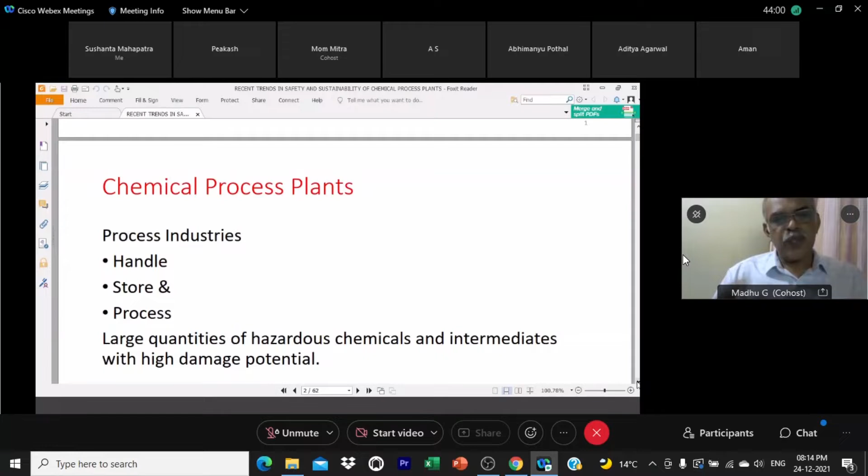As I pointed out earlier, process plants, including petroleum refineries and petrochemical plants, store large inventories of raw materials, intermediate products, and finished products. The substances in storage, along with stressful operating conditions, since many chemical processes work under high pressure, high temperature, as well as controlled exothermic reactions.

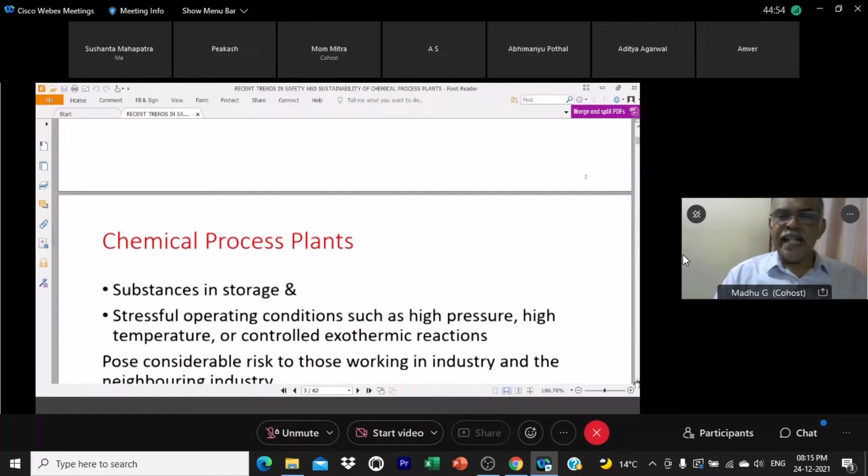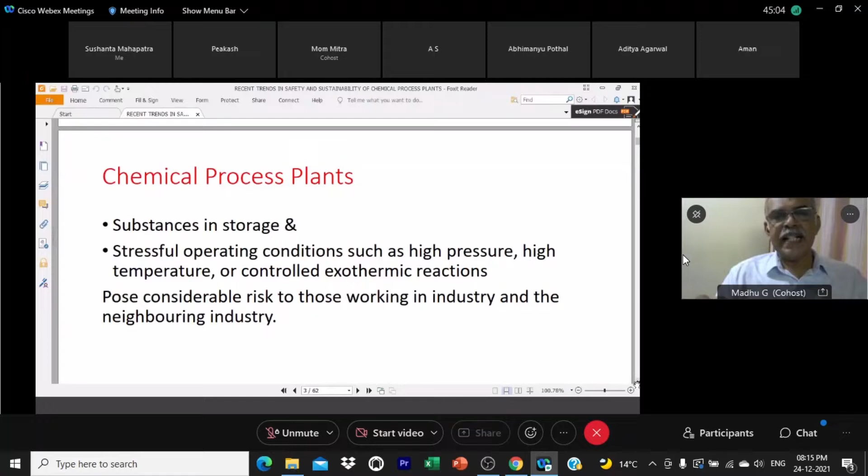These conditions pose considerable risk to those working in the industry, as well as in the neighboring industries and the neighboring community. That is the reason for this high risk in chemical process plants.

You may be aware of the various disasters that have taken place in chemical process plants over the last more than 100 years. Several incidents have occurred. If you examine these accidents involving major hazards in chemical process plants, they can be categorized into two. One is loss of containment or leakage of highly flammable substances.

When these flammable substances are highly volatile, they mix with air and may form a flammable vapor cloud, depending on the flammability range and other factors. That cloud will drift to a source of ignition, and ultimately result in a fire or explosion.

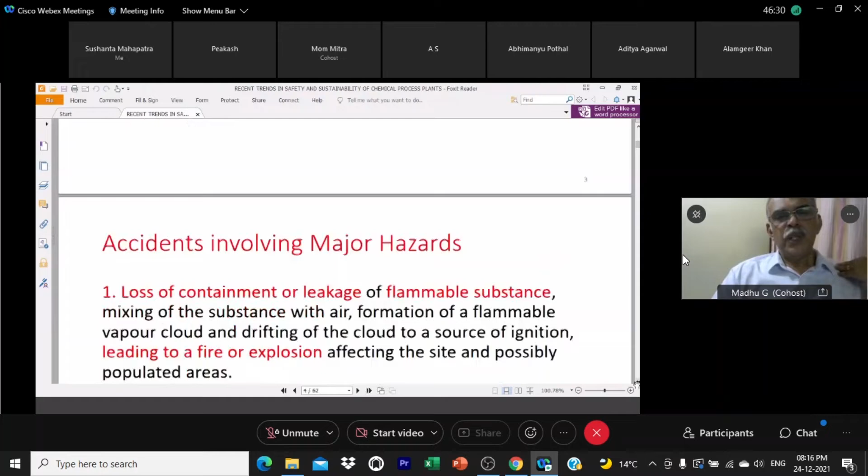Usually vapor cloud explosions and BLEVEs, boiling liquid expanding vapor explosions, are very common in chemical process plants. The fire or explosion will affect the site and possibly populated areas. This is a typical case of loss of containment.

For example, in a petroleum refinery, you have large storages of crude petroleum as well as petroleum products. If there is a loss of containment due to any reason, it can result in such a situation.

The second category is with respect to toxic substances, leakage of toxic substances from the containment. These substances also form a toxic vapor cloud. We have the example of Bhopal, which is considered the worst industrial disaster we ever had. Once these toxic substances form a vapor cloud, they drift in the atmosphere.

A number of accidents have taken place in process plants, and if you analyze these accidents, you find that the main causes were due to four major reasons. Other reasons exist too, but the percentage contribution of these is more. One is human error.

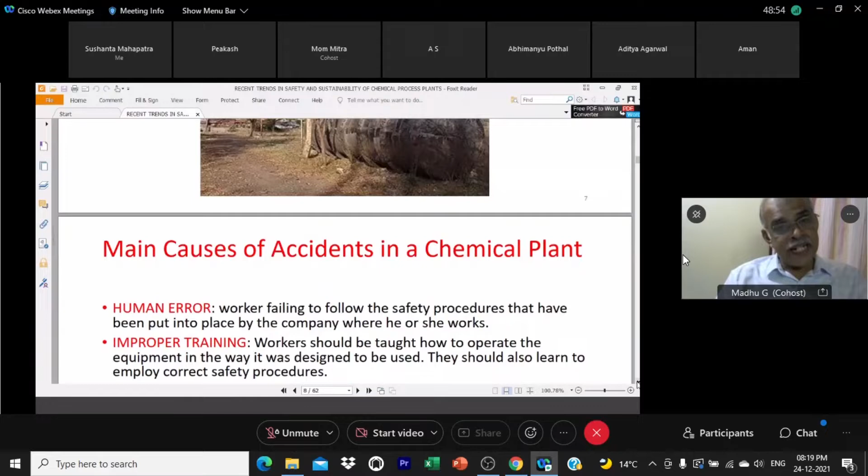Then, of course, improper training. Training plays a major role, educating operating personnel to operate equipment the way it was designed to be used. Equipment should be operated as designed, and operators should also learn to employ correct safety procedures.

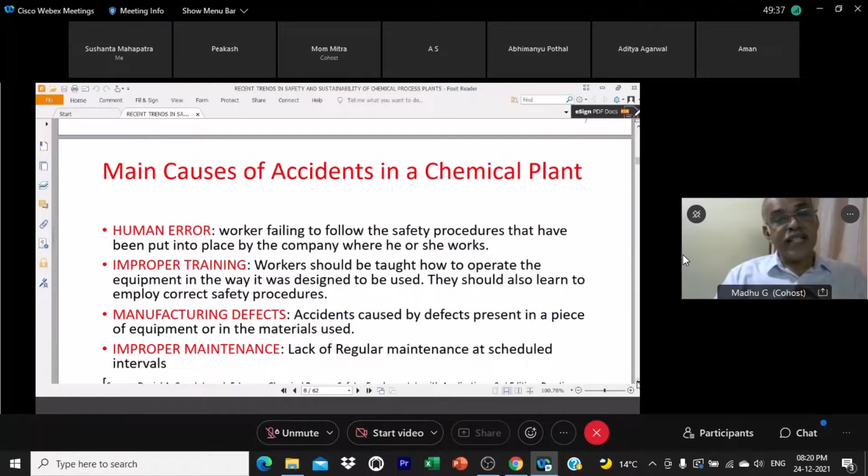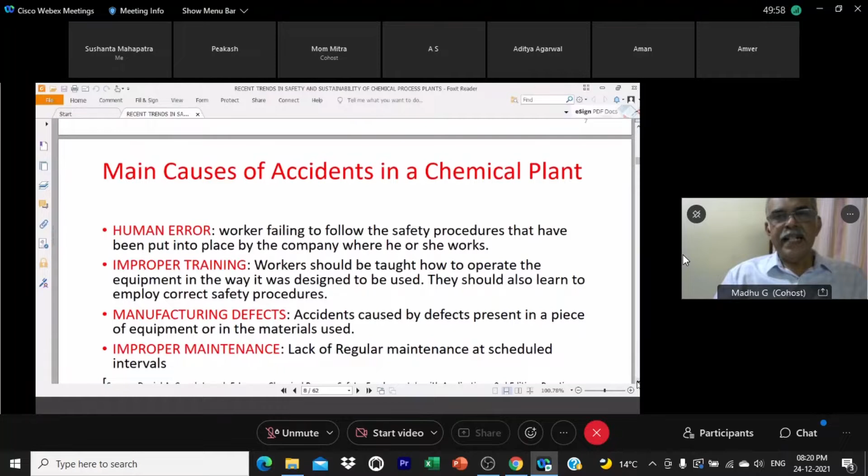Here, of course, the supervisors and the top management has a responsibility. Then the manufacturing defects, defects in equipment as well as the materials used—that is another major issue. Then improper maintenance, lack of regular maintenance at scheduled intervals—that is again another major factor that leads to many accidents in process industries.

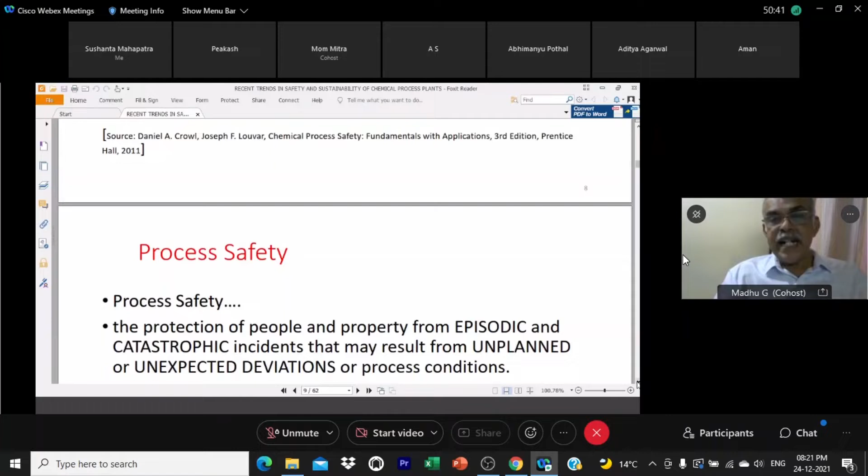Now, coming back to process safety. Process safety can be defined like this. It's a definition given by the Center for Chemical Process Safety of the American Institute of Chemical Engineers. It can be considered as the protection of people and property from episodic and catastrophic incidents that may result from unplanned or unexpected deviations. This can happen because any accident occurs due to unexpected deviations or unexpected process conditions as far as a chemical industry is concerned.

Now, before discussing the recent trends in process safety, I wish to share with you the pillars of process safety. This framework has been formulated by the Center for Chemical Process Safety, CCPS, a very important arm of the American Institute of Chemical Engineers. According to them, there are 4 pillars. They are considered the foundational blocks of process safety.

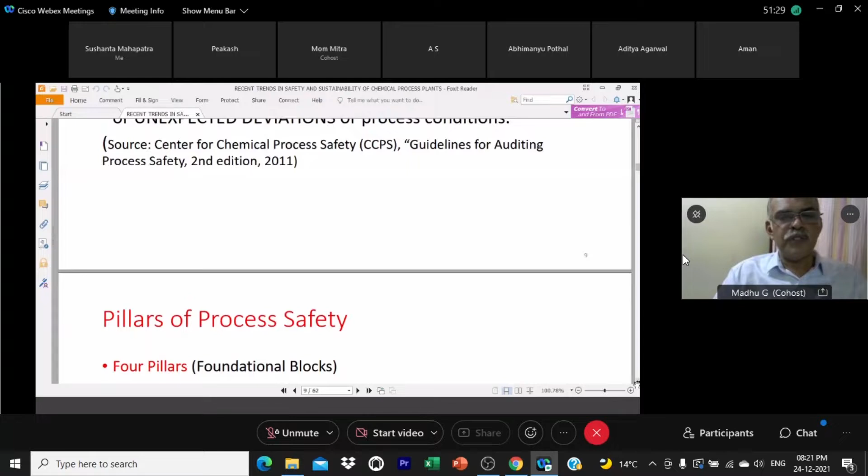One is commitment—commitment on the part of top management. It has to start with the top management, then the middle management, supervisors, and the workers, the operators.

Then the second aspect is understanding the hazards and risks. Only if you understand the hazards and risks properly can you address them in an effective manner.

Then the fourth pillar or foundation is learning from experience. That's very important. Sometimes, of course, when a disaster occurs, everyone will say we will try to learn from this disaster and try to avoid the occurrence of such errors. But anyway, it's human nature—we are all humans, and human beings have a tendency to forget.

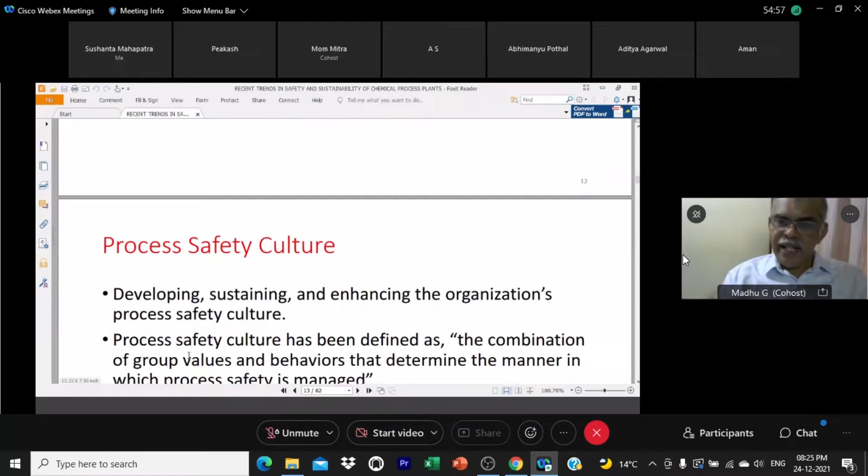Also, that process safety culture has to do with the group values as well as the behavioral patterns of the human beings employed in that organization.

Then, of course, compliance with standards, because several standards, regulations, and laws are applicable to process safety. There are international codes and regulations, then national legislations and local regulations and standards. So the industry is supposed to follow all these standards in the true spirit. The standards help a company to operate and maintain a safe facility.

And also it will help the company implement a consistent process safety practice. And also, of course, it will minimize legal liability. These are the advantages of following the standards, codes, and regulations.

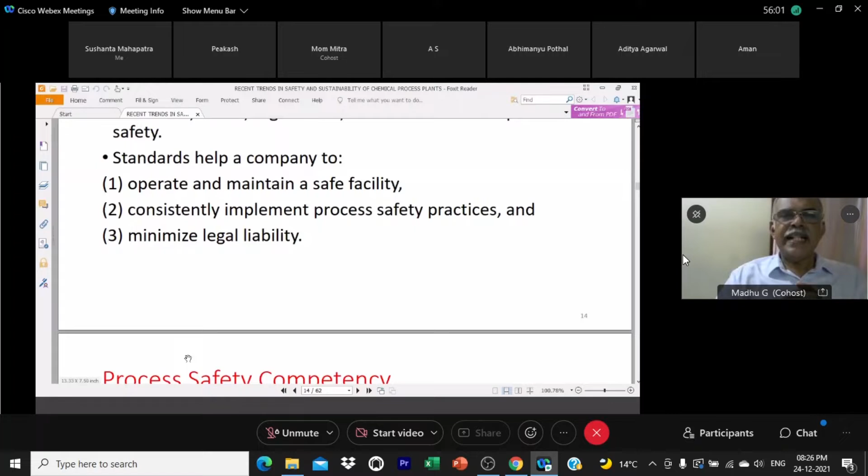Then comes process safety competence. Earlier we talked about the importance of training—developing and maintaining process safety competence. It is through continuous improvement of knowledge, availability of appropriate information, and application of what has been learned in process safety, because availability of appropriate information is also very important.

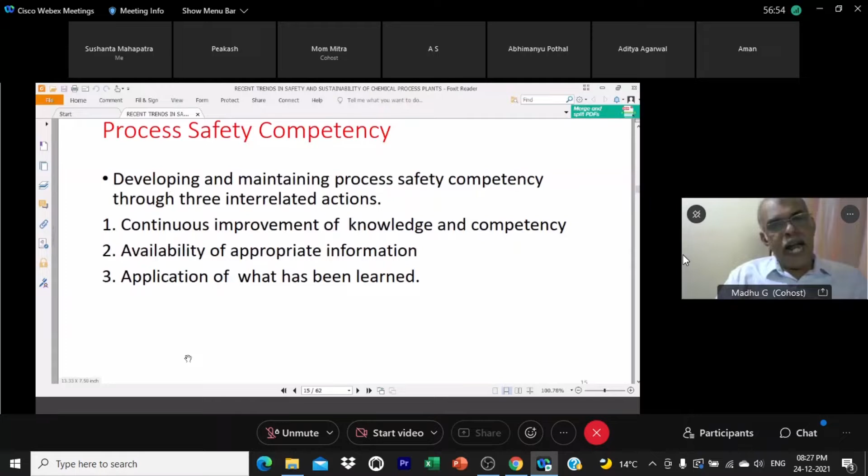Nowadays, we insist that every process plant has the material safety data sheet with appropriate information. Then, of course, the standard operating procedures should be available. So, availability of appropriate information, then application of what has been learned.

Then comes workforce involvement, active participation of the company employees as well as the contractor workers. You cannot avoid the workers of the contractor because they are also working inside the plant. Maybe in earlier days in our country this was overlooked, the safety aspects of contractor workers, but it has changed now. Organizations are taking due care in even training or getting the involvement of these contract workers.

So that is important. Then, of course, the stakeholder outreach. It is just reaching out to individuals, so you should have a dialogue with the stakeholders regarding company operations. The stakeholders may get affected, maybe in the worst case a disaster. If a disaster happens, the stakeholders also will get affected, the surrounding community will get affected. So every process industry has to establish a relationship with the community, with the other companies in the vicinity, and with the authorities.

That's very important, because in 1984, when the Bhopal disaster happened, it was totally absent because the organization had no relationship with the general public. Even at that time, under the Factories Act existing then, it was not necessary to share information regarding the hazardous substances that you store, handle, and process. So it was not shared.

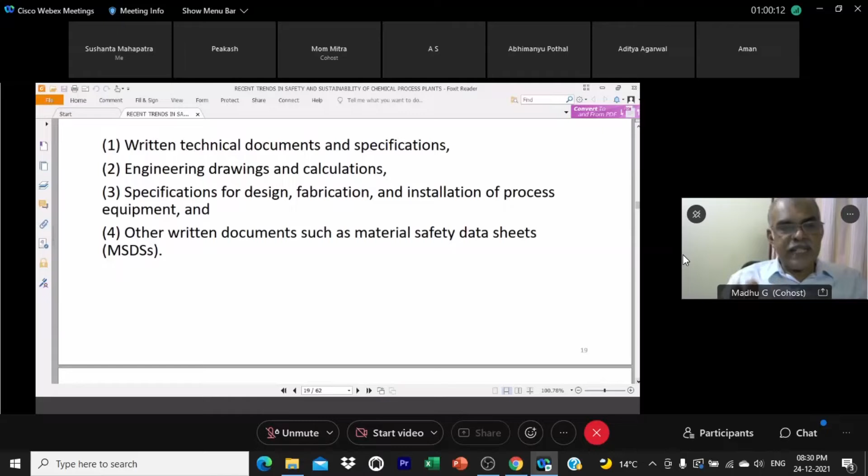Then the detailed engineering drawings and calculations, specifications for design, fabrication, installation of the equipment - all this material which will be available are part of the process safety knowledge. And of course, material safety data sheets - all these should be readily available for reference.

Then, of course, it's a very important activity, hazard identification and risk analysis, and it is a mandatory requirement also in our country. As per the Manufacture, Storage and Import of Hazardous Chemicals Rules of 1989, hazard identification and risk analysis, risk assessment has been made mandatory for a major accident hazard unit handling hazardous chemicals. So even under the Factories Amendment Act of 1987, there is a provision for risk assessment.

So the identifying hazards and evaluating risk at facilities throughout the life cycle of the plant - that's very important, because earlier there was a tendency to restrict this exercise to just before the installation of the plant, at the design stage and before the commissioning of the plant. So it has to be a continuing activity throughout the life cycle of the plant. You are supposed to carry out hazard identification and risk assessment.

And also we have to make sure that the risk posed by the process plant is controlled within the risk tolerance level. There are some benchmarks - anyway, in our country we don't have a mandatory risk tolerance level, so we follow the risk tolerance level proposed by other agencies.

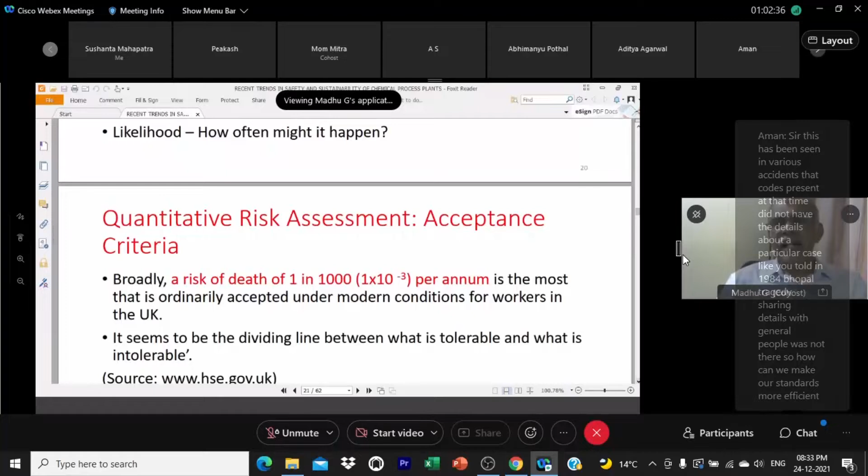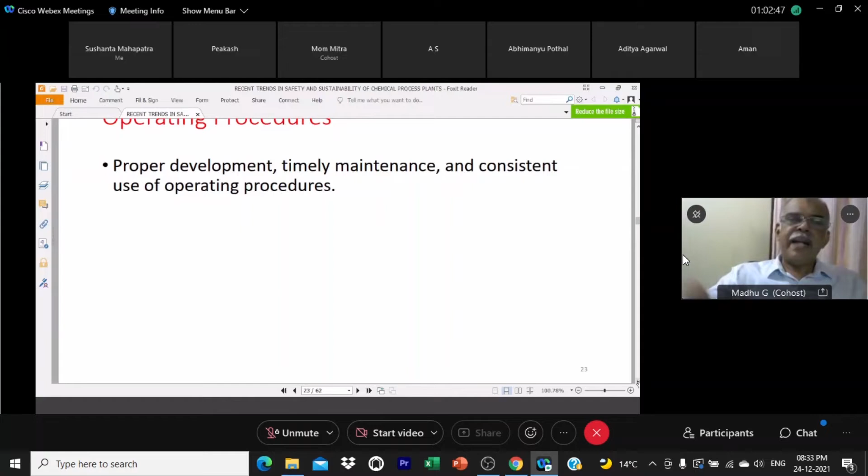Then comes managing risk - it has 9 elements. First of all, operating procedures: proper development, timely maintenance, and use of operating procedures. Then, of course, safe work practices, which are very important for managing the risk. It helps control hazards associated with maintenance and other non-routine work.

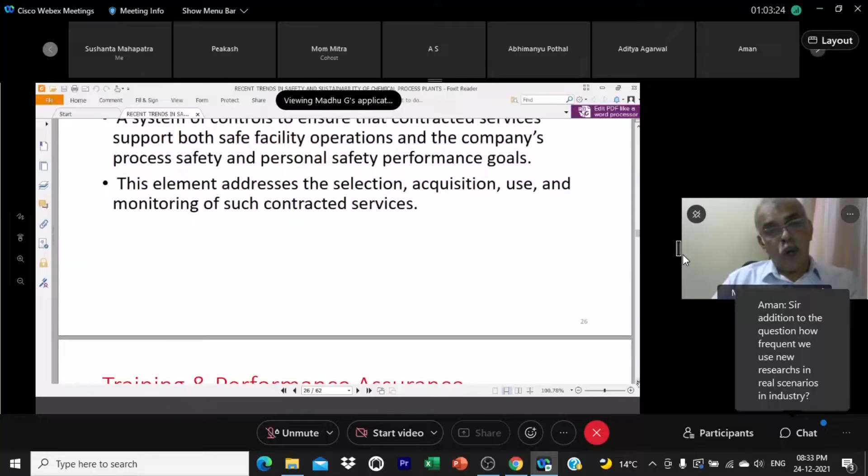Then comes asset integrity and reliability, a very important aspect of risk management. It is to be ensured that equipment are properly designed, installed in accordance with the specifications, and remain fit for use until they are retired. Then, of course, contractor management - there has to be a system.

Then training and performance assurance, training to enable the workers to meet the performance standards.

Then management of change, of course. It is the responsibility of the management to ensure that changes to a process do not introduce new hazards or unknowingly increase the risk of existing hazards. Management of change is a very important activity. It includes a review and authorization process for evaluating proposed modifications, and the potentially affected personnel, all stakeholders, have to be notified of these changes made in the plan.

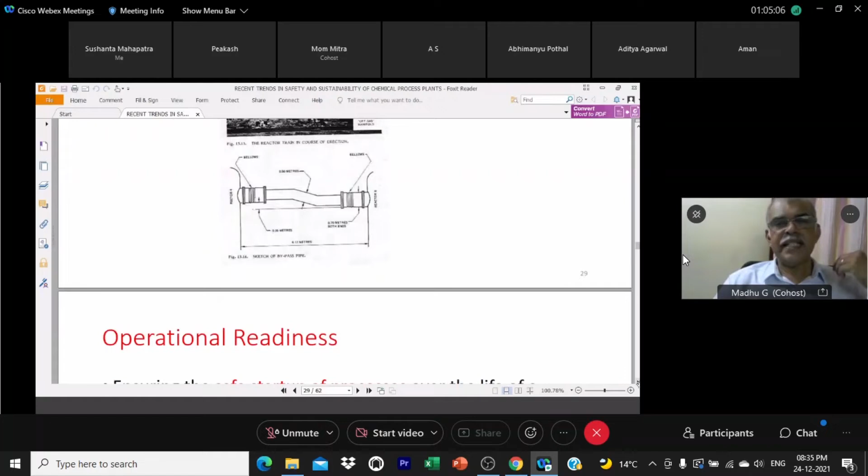This is a lesson learned from Flixborough. I think you're all familiar with the Flixborough disaster of 1974. This disaster occurred in the cyclohexane oxidation section of the caprolactam plant there. There were 6 reactors, and there was some problem with the 5th reactor, so it was taken out for repair. The 4th and 6th reactors had to be connected, and that connection was provided without proper engineering analysis, approvals, and controls. Later investigations revealed that this error led to the Flixborough disaster. So management of change has significant importance.

Then operational readiness, that is safe startup of processes over the life of a facility. Because during startups, there is every possibility of deviations occurring, it is very important to have a pre-startup safety review, PSSR.

Now every process plant does it. And we know that there were issues during the lockdown period declared after the COVID-19 pandemic. In fact, we had a very bad experience at the Vizag gas leak of May 2020. It was the styrene monomer, and somehow the cooling system failed.

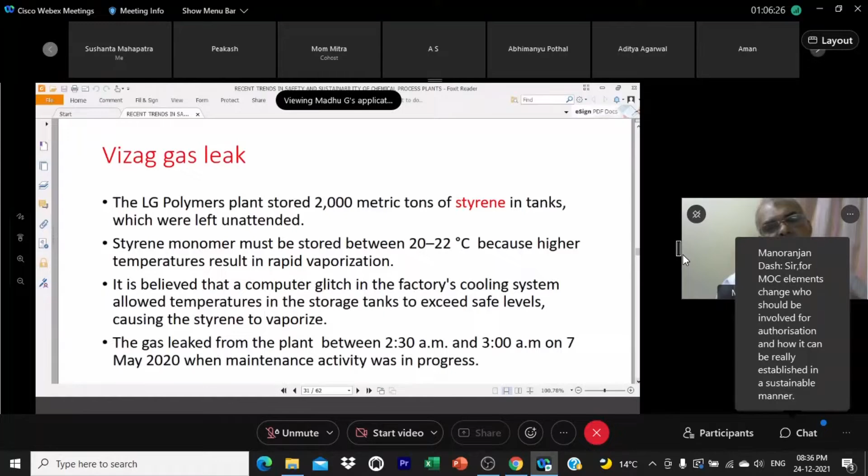It's pointed out that the monomer had to be stored between 20 to 22 degrees Celsius, and higher temperatures can result in rapid vaporization. The cooling system had some problem, and the temperatures exceeded the safe levels, causing the styrene to vaporize and the gas leaked out.

Then, of course, conduct of operations, execution of operational and management tasks, then emergency management. In spite of all the precautions that we take, we should have a very efficient emergency management plan. Again, in our country, it is mandatory to plan for on-site and off-site emergencies. The preparation of the off-site plan is the responsibility of the district administration.

Then the fourth element, learning from experience. Whenever an incident occurs, there has to be a formal process for investigating it, and the investigation data and trending of the incident should enable the organization to identify recurring incidents and take precautions to prevent them.

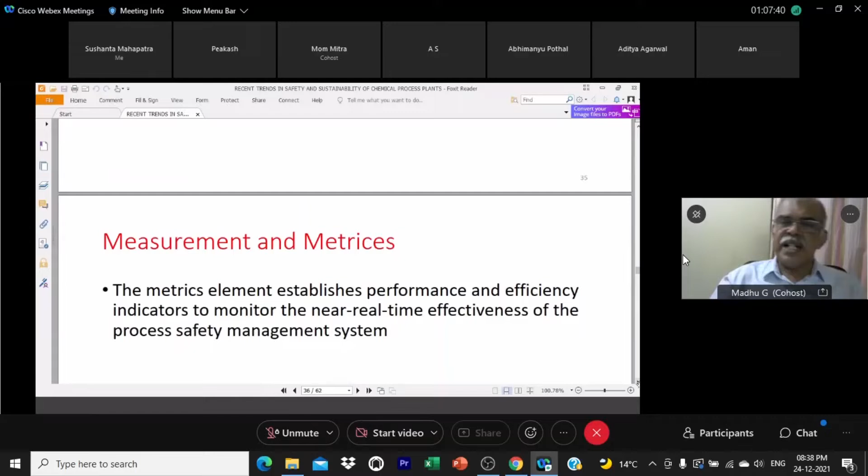That's very important. Then, of course, measurement and metrics for performance and efficiency assessment. Then auditing, like safety audits and other auditing procedures, management review, and inspection. Any management system has to have a provision for continuous improvement. Some management systems call it continual improvement, a gradual, step-by-step improvement.

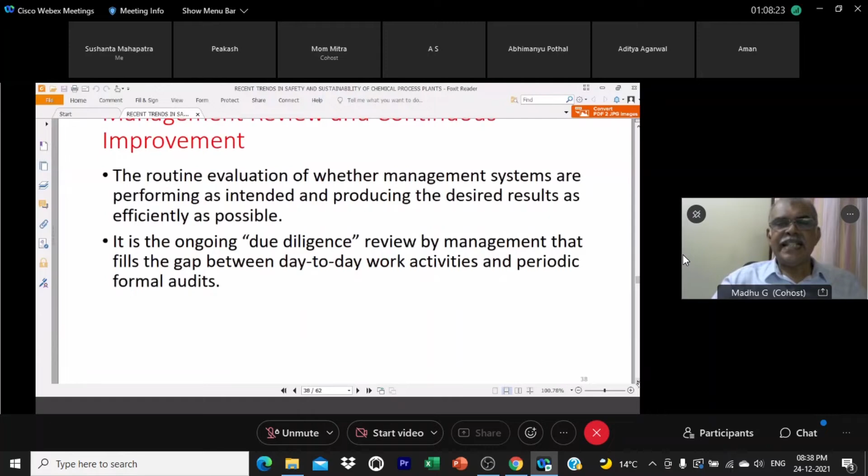So these are the pillars of process safety. Now let's talk about the recent trends in hazard identification and risk assessment, risk analysis. It is part of the second pillar, understanding the hazards and risk - specifically hazard identification and risk analysis.

A lot of work has been done during the last 40 years or so. In fact, the whole exercise started after the Flixborough disaster. It was really an eye-opener for the Western world, the European countries, and they started formulating procedures for the identification of hazards as well as assessment of risk.

Now we have a long list of hazard identification techniques like inventory analysis, Dow Fire and Explosion Index, MOND Index, what-if analysis, and hazard and operability study. Hazard and operability study was developed in the United Kingdom by ICI, Imperial Chemical Industries, in the 1970s. That great safety guru, Trevor Kletz, was part of that exercise.

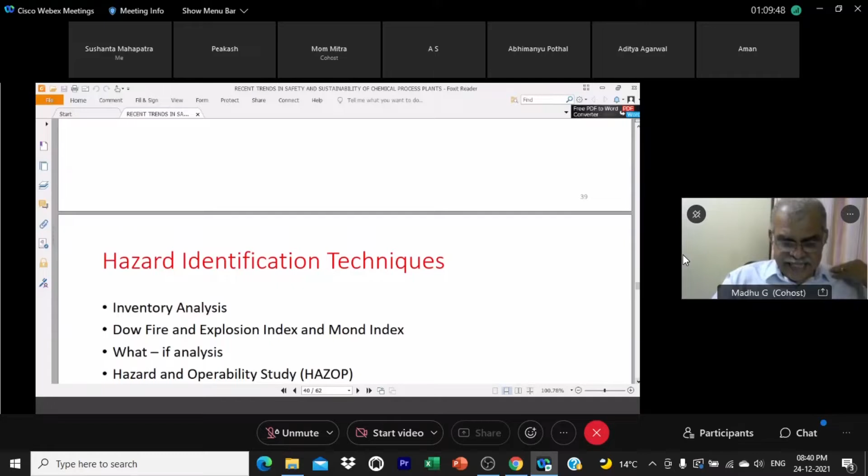Then failure modes effect analysis, failure modes effects and criticality analysis. Hazard and operability study is very popular in chemical process industries, and whenever changes are made in the plant, HAZOP studies are carried out. Then techniques like fault tree analysis and event tree analysis are useful in estimating the frequency or probability of occurrence of the hazard. The bow-tie analysis links the fault tree and event tree.

You can have a bow tie with the barriers in between. It's a very useful exercise.

Several techniques have been developed over the years, and they are used by the process industries for hazard identification. Usually, when a risk assessment report is prepared, some of these techniques are employed to identify the hazards.

Then we can think about LOPA, layer of protection analysis, then functional safety, safety integrity level assessment of the instruments. Because process instrumentation and control plays a major role in preventing or maintaining the process parameters, the integrity level of instruments is assessed.

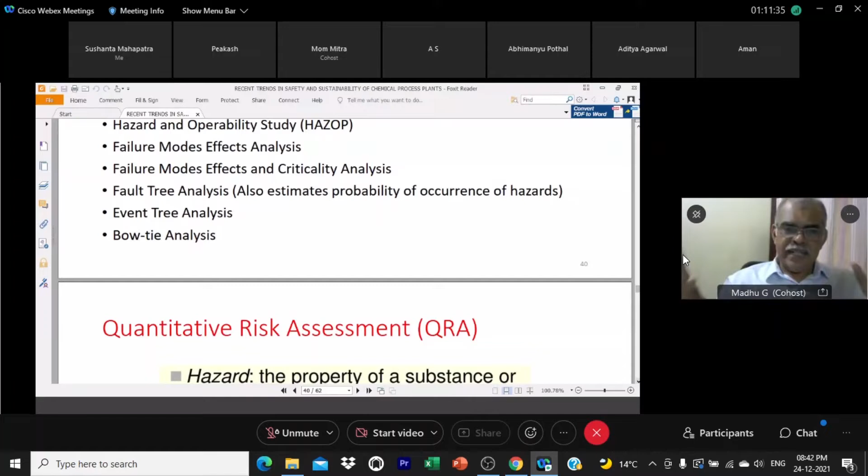So many techniques have been developed. That is the first part of risk assessment. Then comes the quantitative risk assessment.

In quantitative risk assessment, we differentiate between the hazard and the risk. A hazard is anything, the property of a substance or situation, with the potential for creating damage. The risk is the likelihood of a specific effect within a specified period.

So risk is a complex function of probability, then the consequences of the event - it may be a fire, an explosion, or a toxic gas dispersion - and then the vulnerability. These three factors are considered when we compute the risk.

So you usually identify the hazards in risk assessment, then quantify the risk, then determine component safety measures, and the units or sections where human interventions are important for process safety.

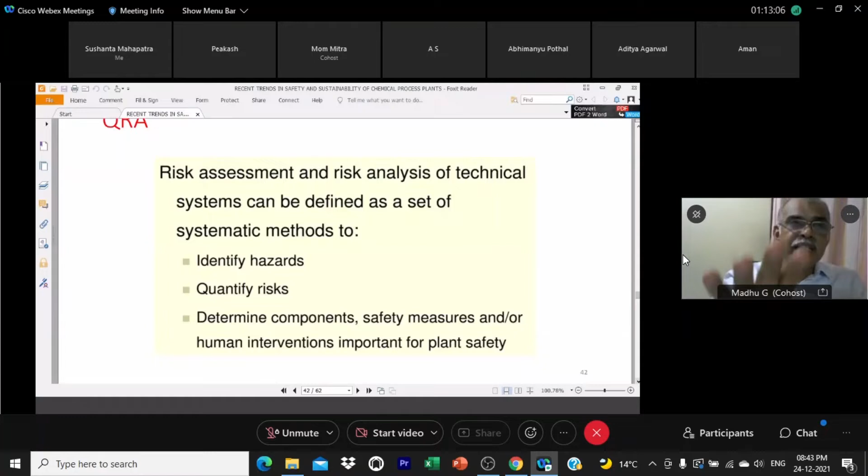Sometimes we try to prioritize the risk available in the plant, the risks posed by different sections of the plant, because the risk posed may not be the same - some sections of the plant may have a high risk potential. So you can prioritize the risk with the information and techniques available to us.

You cannot say that these techniques are all foolproof. They have been developed over the years, and of course there is always scope for improvement. So we try to quantify the risk.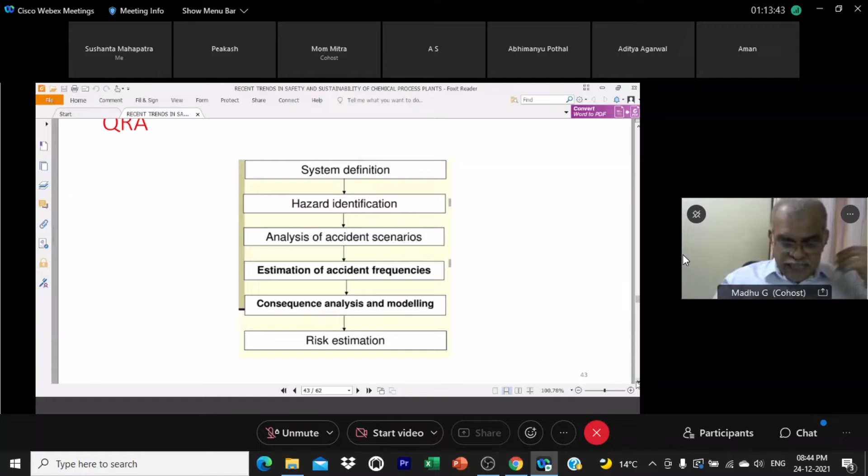In hazard and scenario analysis, we consider the likelihood and consequences. Consequence assessment is an integral part of any risk assessment activity. It is used to determine the distance to which casualties or damage may occur as a consequence of an accident.

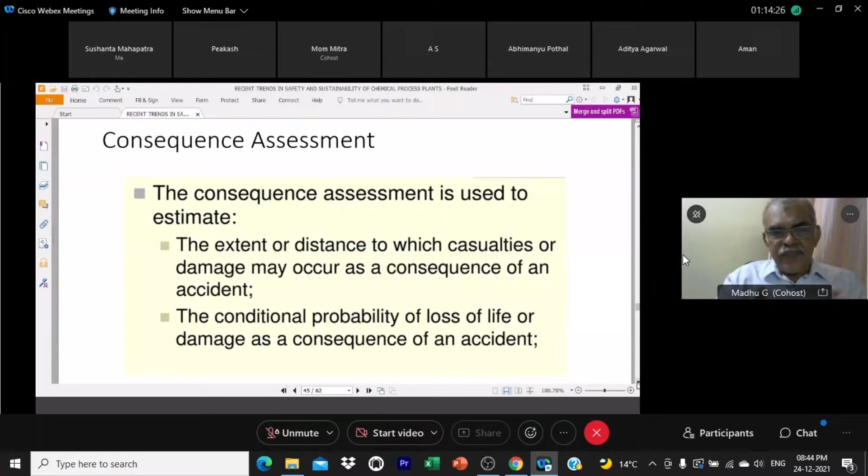So the conditional probability of loss of life or damage as a consequence of an accident will be assessed in the consequence assessment. We make use of empirical and semi-empirical equations for consequence assessment.

Now, very useful softwares are available in the market. Softwares like PHAST, SAFETI, etc. are widely used by the process consultants who carry out risk assessment studies.

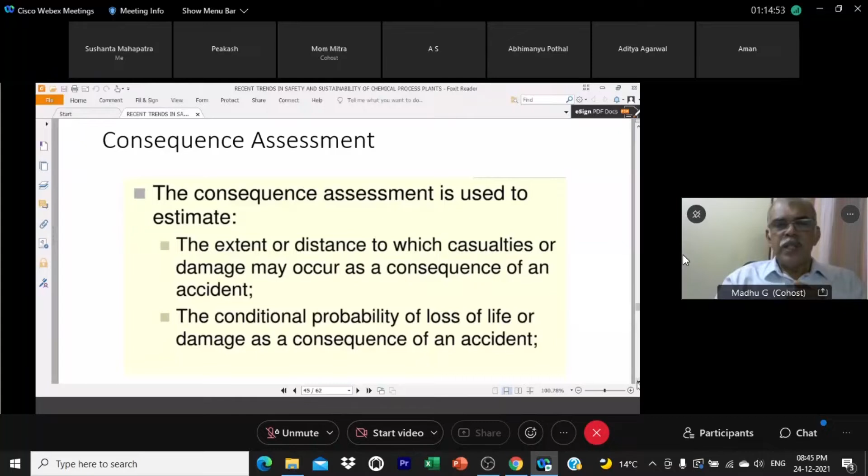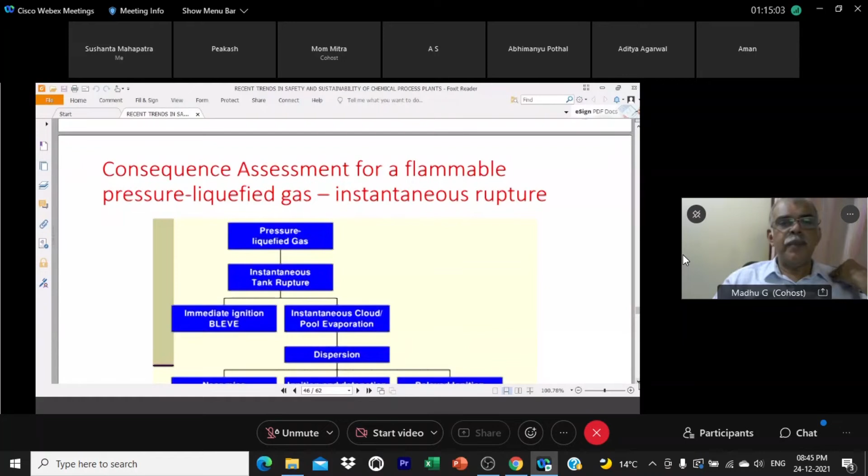So this is a typical consequence assessment for a flammable, for the instantaneous relief or release of a flammable pressure liquefied gas.

So here, of course, you have to estimate the discharge rate, assess the tank rupture. Then you have to visualize the various scenarios and make the calculations for the different consequences like fire, explosion, and dispersion.

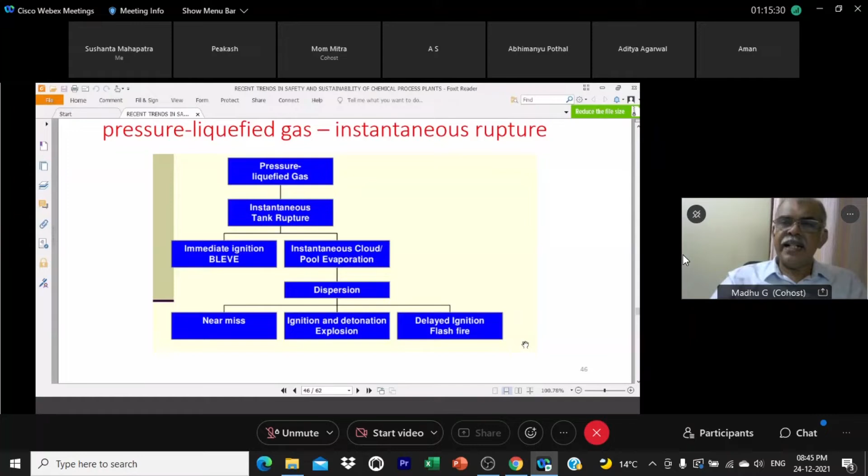Then coming to risk, there are two ways to classify the process risk: individual risk as well as societal risk. Individual risk is a sort of hypothetical concept.

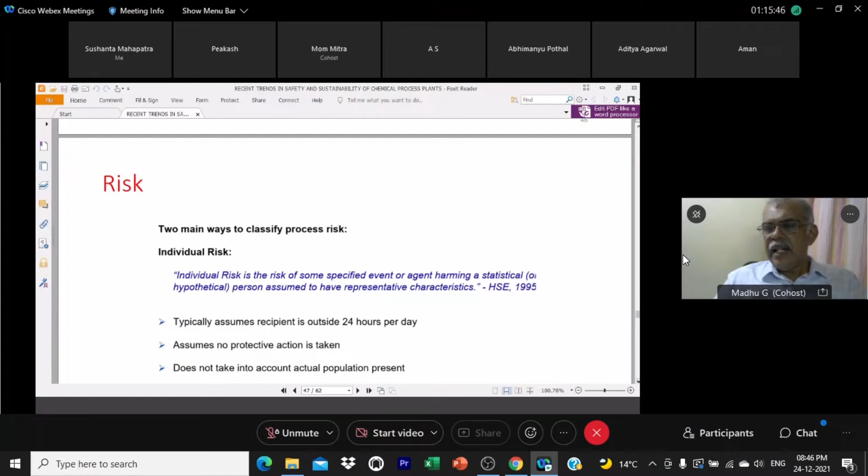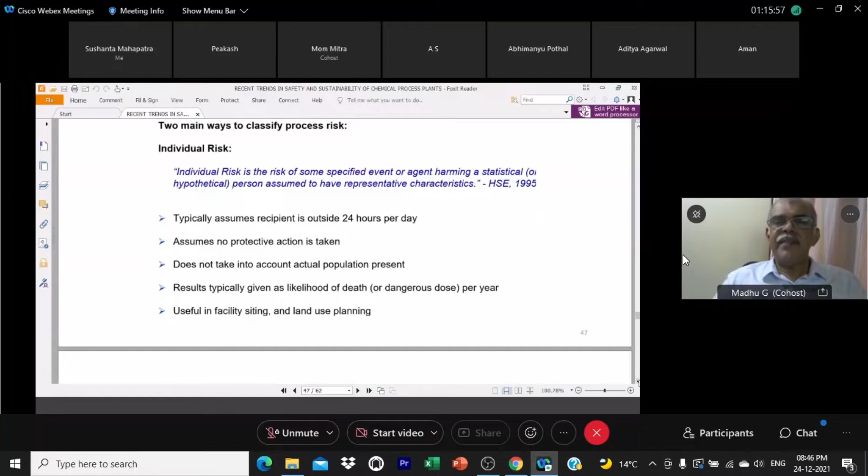It is some specified event to a hypothetical person, assumed to have representative characteristics. Again, some assumptions are made - it assumes no protective action is taken, typically assumes the recipient is outside 24 hours per day, and all that.

Then, of course, the societal risk. Societal risk takes into account the actual population present, and usually we make an FN plot. It shows the frequency of accidents involving N or more fatalities, and it can be represented as a single number - earlier you had seen that 1 into 10 to the power of -3 fatalities per year, average rate of death. Then it can also be modified to show financial risk.

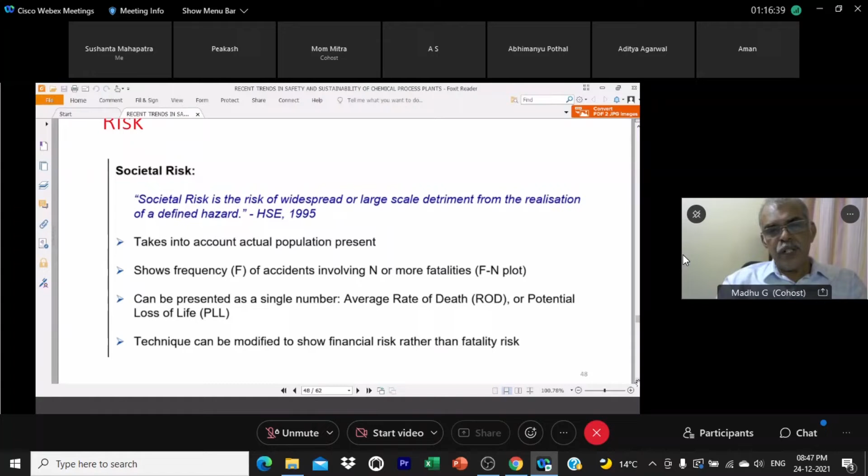So the QRA methodology is once again summarized here.

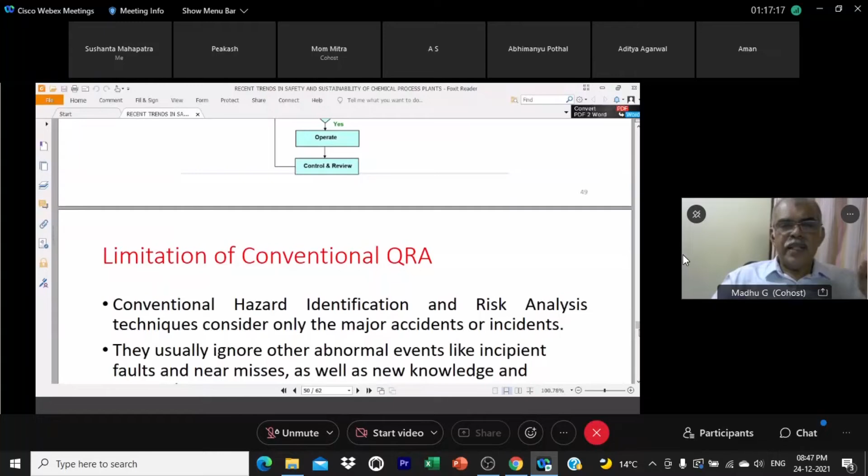Until the early part of the 21st century, industries and consultants were carrying out conventional QRA exercises, conventional quantitative risk assessment. This has a disadvantage - conventional QRA considers only the major accidents or incidents, so there was a tendency to ignore abnormal events like incipient faults, near misses, and also new knowledge and variations in the system. These categories used to be ignored in conventional QRA.

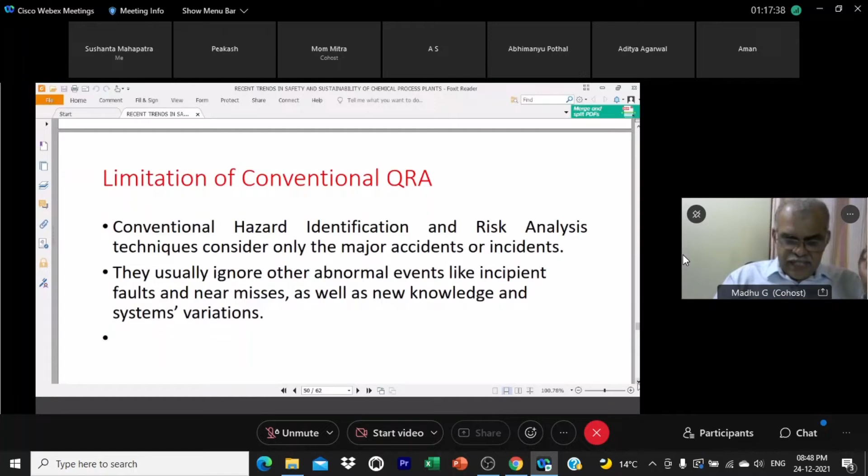So by 2006, the concept of dynamic risk assessment methodology emerged.

It was developed by these two safety specialists, Meel and Seider. Their approach aimed at estimating the dynamic probabilities of accident sequences, including near misses and incident data, as well as real-time data from process. So they tried to make use of data related to near misses, incident data, and real-time data from processes.

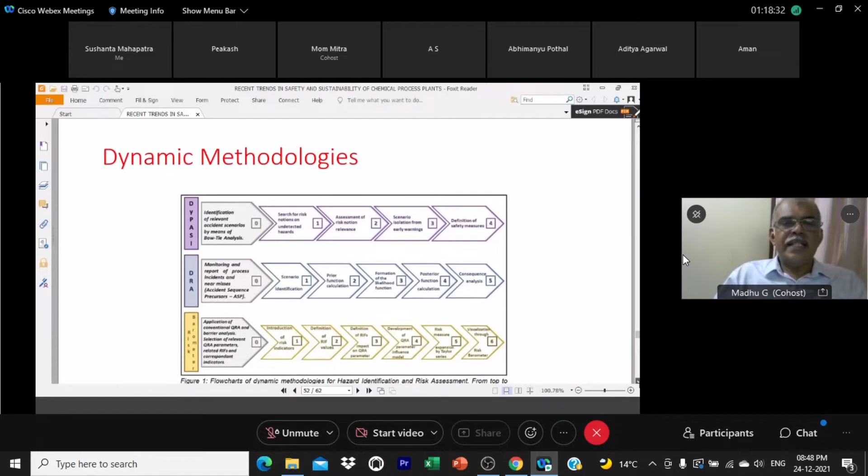This is again a summary of the various dynamic methodologies. Now the middle one, the dynamic risk assessment methodology, is the most popular one. Here, monitoring and reporting of process incidents and near misses are the steps. It involves scenario identification, then prior function calculation, then formation of the likelihood function, then posterior function calculation, and then consequence analysis.

And of course, the statistical technique of Bayesian network is widely used in this dynamic risk assessment, which was developed during 2009. The first paper was published in the year 2009.

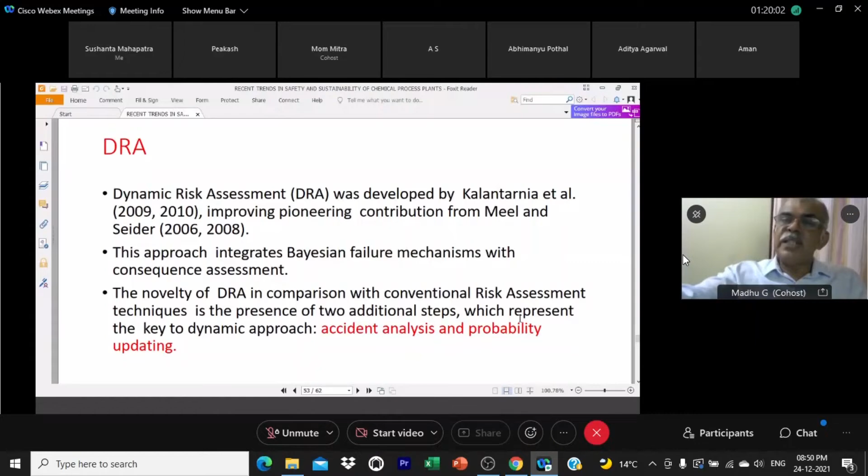This dynamic risk assessment approach integrates Bayesian failure mechanisms with consequence assessment. If you make a comparison with the conventional QRA, you find there are two additional steps in dynamic risk assessment: one is accident analysis, and the second is probability updating. That's what you saw earlier with prior and posterior functions, which is for probability update.

Now, as a whole, the QRA exercise, as I told you earlier, it started in the 1970s. And of course, it was introduced in our country towards the second half of the 1980s after the Bhopal disaster.

So it has its own advantages, even including dynamic risk assessment. It's a good basis for consistent decisions. That is very important. That's a great advantage when different types of hazards have to be considered.

Then it can be used to analyze the various contributors to an overall risk as a basis for determining the major contributors, for prioritizing them. Then it's a useful way of demonstrating that certain events are unlikely to occur, so we need not spend time on these events. But it has its own drawbacks also.

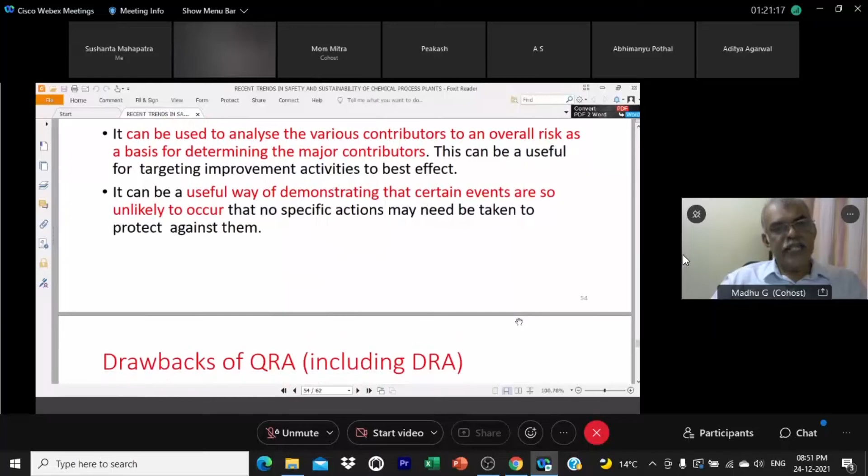QRA technique, even dynamic risk assessment also has drawbacks. The earlier conventional QRA had disadvantages, but that uncertainty element has been addressed to some extent in dynamic risk assessment. But still it is a complex analysis. QRA is a complex analysis, usually computer-aided, making use of software.

So generally it can lack transparency. That's a drawback. Then there is a danger when we estimate probability values. For estimating probability, to address the issue of uncertainty, we have adopted different techniques over the years. A large number of research papers have been published during the last 15 years or so, applying various mathematical and numerical techniques, including soft computing techniques, to remove the uncertainty in the estimates.

But still, there is a danger of overconfidence in the estimates of probability. There may not be sufficient data available for a particular case, because for probability, usually in Bayesian network or fuzzy logic, we use different types of fuzzy techniques and expert elicitation, expert judgment. So there are possibilities of error even in expert judgment, because they may overlook incidents that are very rare in nature. That danger is there.

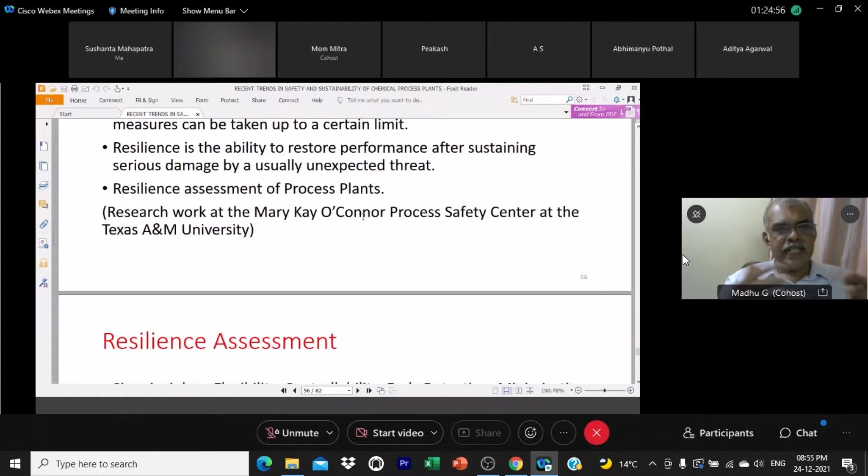The Mary Kay O'Connor Process Safety Center at Texas A&M University has started working on this resilience assessment. It is based on 6 principles: flexibility, controllability, early detection, minimization of failure, limitation of effects, and administrative controls and procedures. There are 5 main factors contributing to resilience, and researchers have tried to develop methodologies for resilience assessment, taking into account design, detection potential, emergency response plan, human factors, and safety management.

So that's about the recent trends in hazard identification and risk assessment. Now, the title of my talk is recent trends in safety and sustainability. Of course, process safety, process industry.

The process industry is giving a lot of importance to sustainability. As you know, there are three pillars of sustainable outcomes: environment, economy, and the social sphere. Usually, more attention is given to improvements in the environmental outcomes.

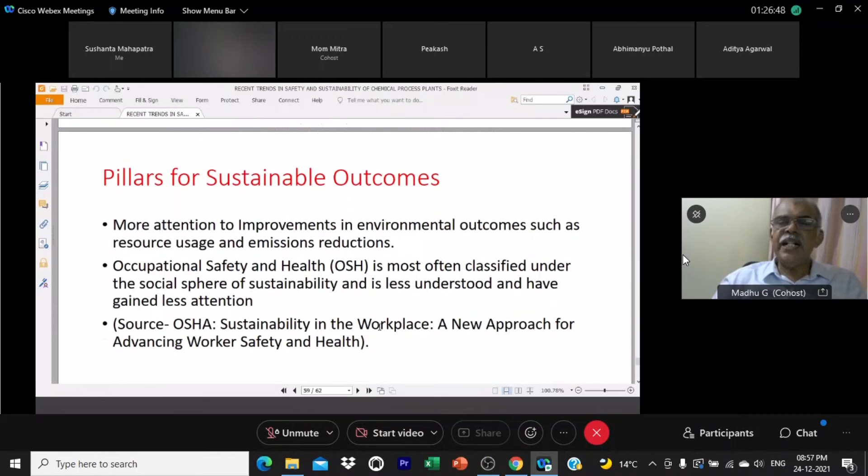Like resource usage, emission reductions, because now everyone talks about reducing carbon emissions. So a lot of attention is focused on environmental outcomes, whereas aspects like occupational safety and health are usually classified under the social sphere of sustainability, so they get less attention compared to the environmental component. There is a need to give more attention to this area when we think about sustainable outcomes.

The process industry has initiated several strategies and made several initiatives for ensuring sustainability, like adoption of inherently safer processes, process intensification, cleaner production strategies, pollution prevention and waste minimization, reduction in greenhouse gas emissions, and transition to circular economy, where we try to make use of the waste generated. All these strategies can contribute to the environmental sustainability of chemical process industries.

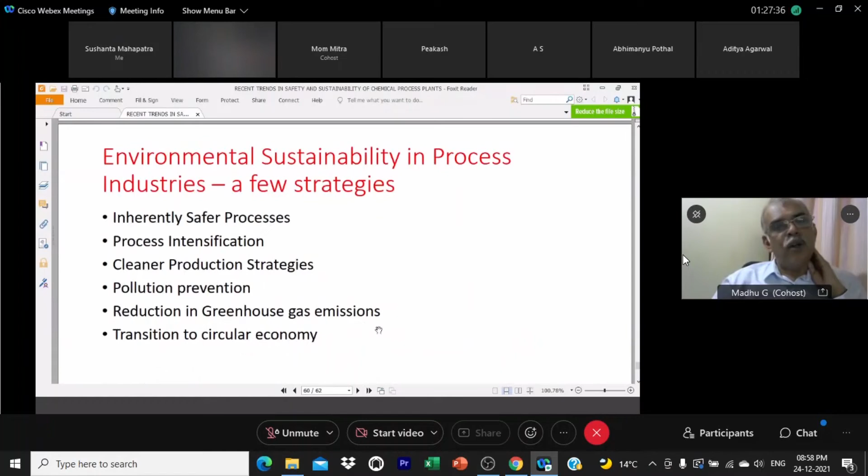There is a need to ensure safety as well as sustainability of the process plants, because human life is precious and has to be protected. So process safety should be given its due importance, and along with that we have to ensure environmental sustainability. Safety and sustainability are related to each other, because a major safety problem can affect the environmental sustainability of the process industry. So we have to give equal importance to the practice of safety as well as the practice of sustainability in the coming years.

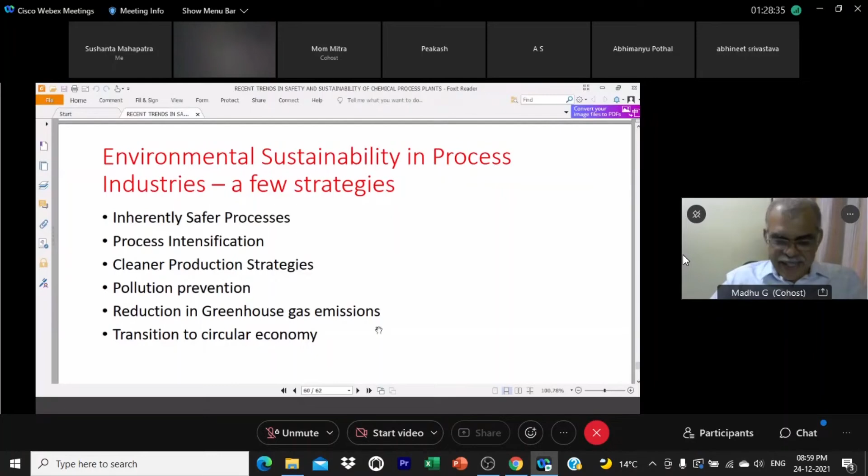So with this, let me wind up my lecture. Thank you very much for your patience here.